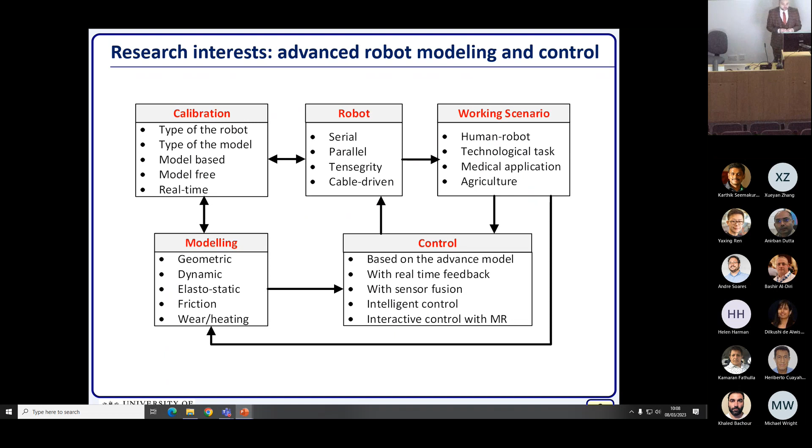Also addressing different sides of control, from advanced model-based control based on the models developed in my research, with real-time feedback, to intelligent control and interactive control using mixed reality interfaces.

Here's a brief overview of my career. I started in Belarus, working on design of experiment for robotic calibration. After, I moved to France, where I spent 7 years, and my PhD topic was on stiffness modeling for robotic manipulators, and I'm continuing research in this direction.

For my postdoc, I worked on industrial robotics, focusing a lot on geometric and elastostatic calibrations. These two parts I will present today. Further, in 2015 I moved to Russia, where I launched 4 new topics for me: MSA technique for stiffness model, human-robot interaction, interactive control, and trajectory planning.

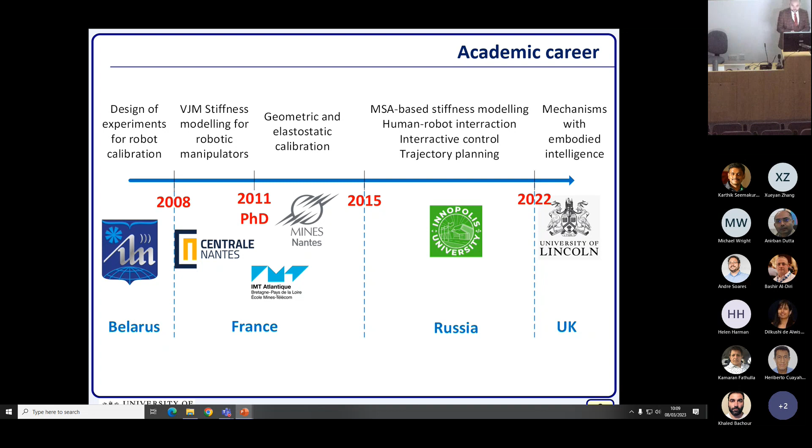And since 2022, I'm at University of Lincoln, and the new challenge for me there is to work on mechanisms with embodied intelligence.

Let me start from the motivation why I started working on contact operations and what it means for us. Usually when we talk about the interaction of the human with the robot, or the machine in different tasks, we have a reaction force from the technological process to the robot, from the human to the robot.

And in most cases, we think that this is a disadvantage for us. And that's true if you're talking about industrial applications—these forces affect the accuracy, and we need to do something about this.

This inaccuracy that we get is mainly due to flexibility of the robot, due to elasticity of the components we have. The only way to consider this and improve the model and control of the robot is to predict these deviations from the target and take them into account in our model.

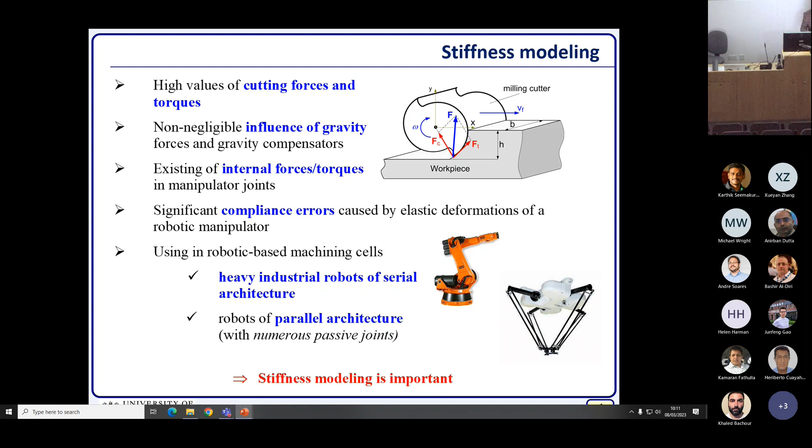That we can do through stiffness modeling. I should mention that stiffness modeling is important both for serial heavy robots, where the stiffness is high but the load is high and the external force in the technological process is high, and also for parallel robots that aren't heavy but have low cross-section—so for the same effort of 10 kilograms, you might get very essential deviation from the end effector of the manipulator.

There are 3 main methods in robotics to work on stiffness modeling. First is, I would say, the most reliable—finite element analysis—but we cannot do it in real time, so usually we use it only for validation.

In my research, I use this not only for validation, but also to estimate precisely the model parameters, and I will address this a little bit.

Another approach is matrix structural analysis. It's known from structural mechanics, but it's not yet suitable for nonlinear stiffness modeling, though I also have essential contribution to this one, and if someone is interested, I have about 20 slides at the end to present this topic completely.

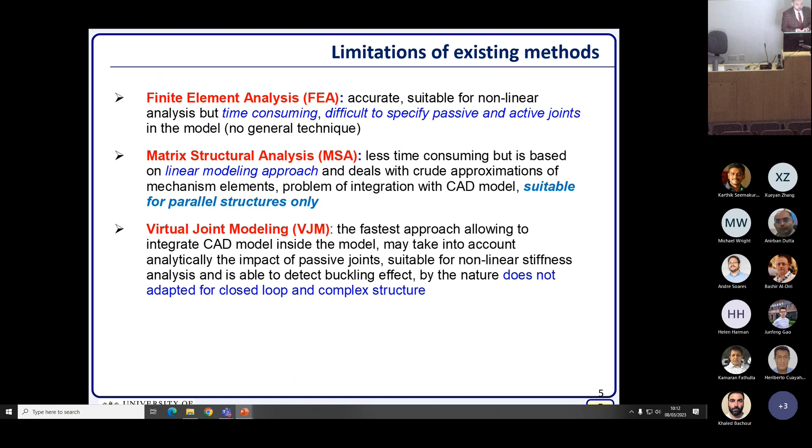And from my point of view, the best one—and it's an honor for me to be one of the co-designers of this approach—is virtual joint modeling, which extends the classical rigid body model and is suitable for nonlinear stiffness analysis. I would like to address it now.

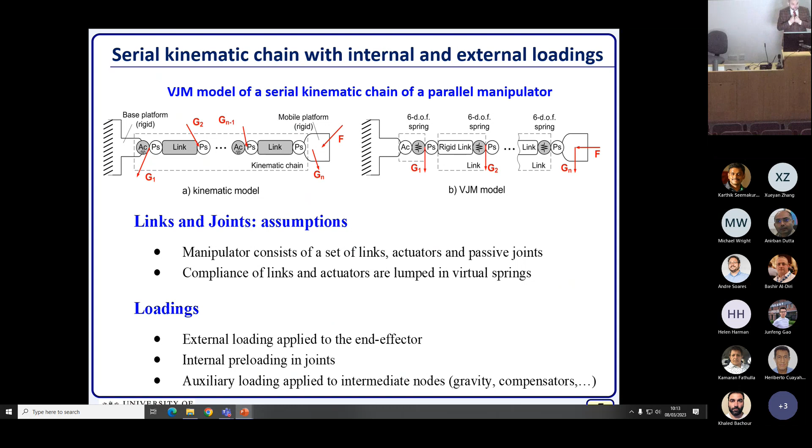In virtual joint modeling, we represent our classical geometrical model, and we replace the flexible components like links, actuators, robot base with perfect rigid components describing geometry and elastic springs that take into consideration the elastic properties of these links. So here, for example, is how we can represent the Stewart platform.

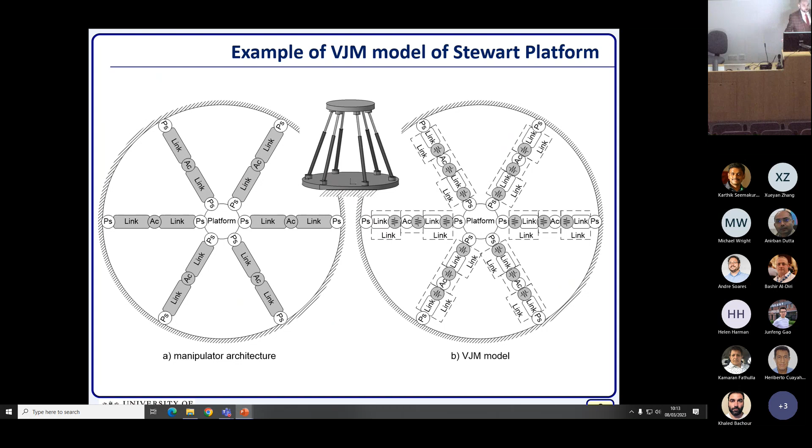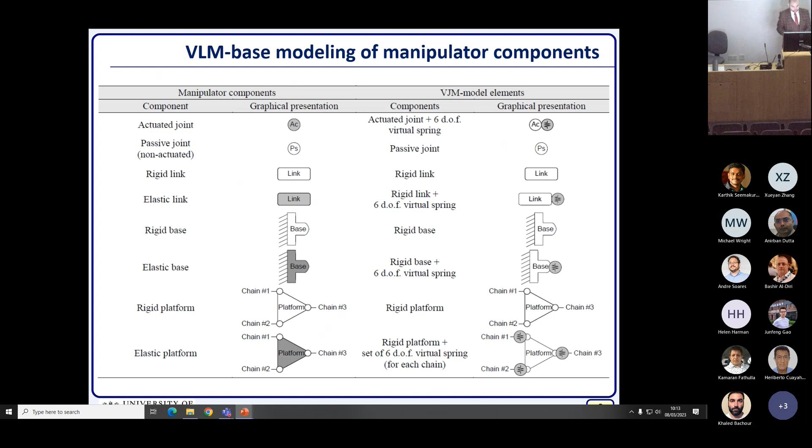So we have elastic links. We represent them with rigid links and perfect rigid links and virtual springs, actuators, virtual springs, and passive joints. They are passive, they don't have any elasticity, so we keep them as they are. So here there is a complete library of how we can transfer the components of the model into a VJM model - how elastic components transfer, how rigid components, and how passive components.

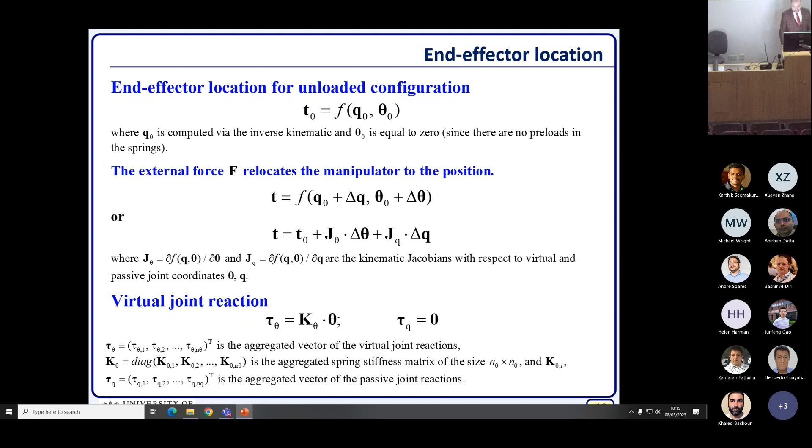So all these deviations of the end effector and the reaction in joints will create some virtual work inside of the virtual springs, and we'll have reaction due to elasticity, like here matrix K theta that aggregates the stiffness property of the link. So here you see the solution.

How we can evaluate this - what we did is develop two basic techniques that can be used for stiffness analysis of different types of manipulators under loading. On the left hand side you see the numerical routines, where we can simply combine the matrix and extract the component after the inversion. The disadvantage of this approach is that sometimes we need to invert a high rank matrix, because here, for example, Jacobian J theta, this is Jacobian with respect to virtual joints, has a high dimension.

It has a high dimension. So if you have 30 virtual joints or 30 springs in the system, it means it has 30 by 6 dimensions, and it can be 80% of the matrix dimension in this case.

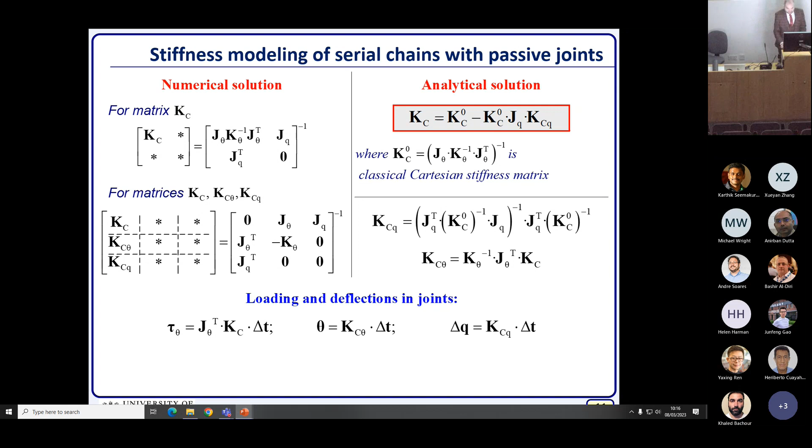It's clear that adding a passive joint decreases the stiffness. That's why we have a minus here in the equations. And with these routines, we can easily...

get analytical solutions even for parallel robots, like the Stewart Platform, for example. With the two-assembly mode, we can get this solution, and we can get a full rank matrix, and we can get a rank deficient solution. So it's quite evident that we don't have a reaction on rotation on Z here. That gives us stiffness equal to 0.

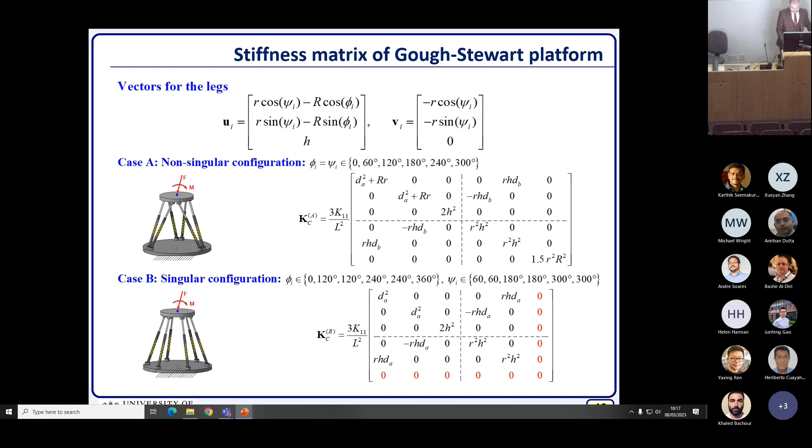From that point of view, we can also use stiffness analysis to detect singularities, because at a singularity we have a rank deficient stiffness matrix as well, while we can still compute them either numerically or analytically.

So in all mechanical structures, we will have errors, and these errors will affect the position of the manipulator. If we talk about serial structures, usually they will be accumulated. While when we talk about parallel structures, they will be accumulated for each kinematic chain, and after, when we combine them together, we will average the errors.

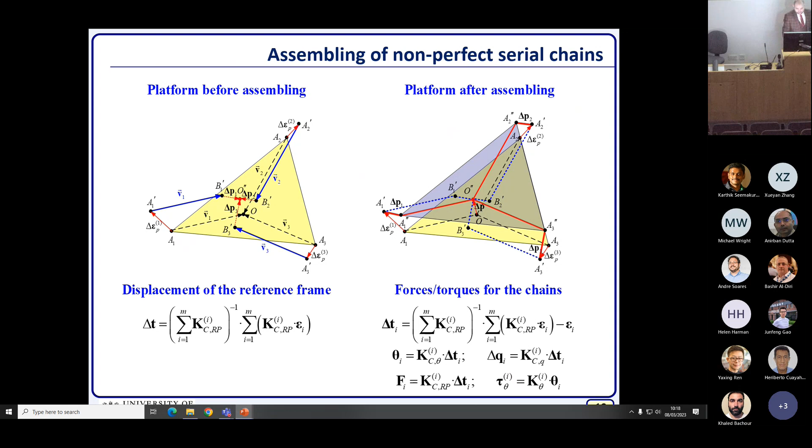While to be able to assemble such a structure that has errors in the kinematic chains, we will need to introduce force. So we will get preloadings, and we'll have routines allowing us to compute the deviation of the end effector due to inaccuracy in the serial chains, and allow us to compute the reaction forces in each chain and the corresponding reaction force and energy. So that solution is obtained using the minimum of energy principle.

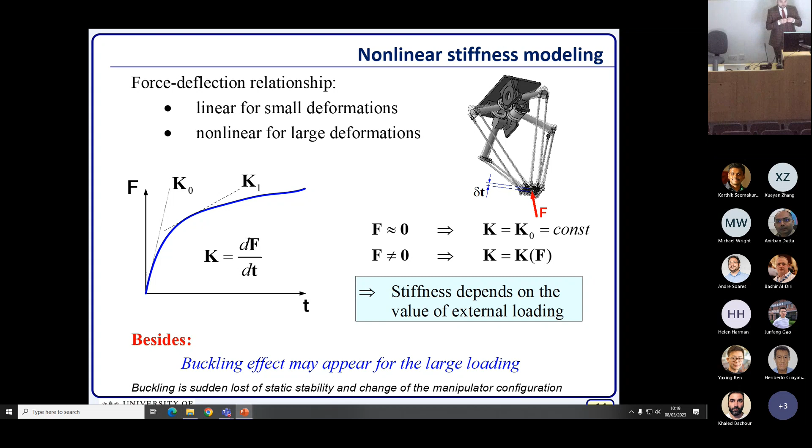I'm proud to be the first one who detected this effect in robotic structures, and the approach we developed allows us to estimate the pre-buckling and post-buckling condition in mechanical structures. We know this from column buckling: when we apply force at a certain level, the column doesn't change shape essentially, but after that it drops down. The same might happen in robots. Here we're not talking about buckling of elements, but geometrical buckling of the structure.

That suffers from instability with a much lower force we need to apply. So to address the nonlinear stiffness analysis, first we need to find the equilibrium configuration. We use static equilibrium equations and geometrical constraints specifying the end effector positions, which allows us to derive an iterative procedure to get the state for the static equilibrium configuration.

So here, what we are given is the position and the shift of the position, where the end effector moved, and we compute the reaction force F and corresponding deviations in the virtual and passive joints. What's important is that after the configuration change, we need to recompute the Jacobians, because they should be computed in the vicinity of the current loaded configuration.

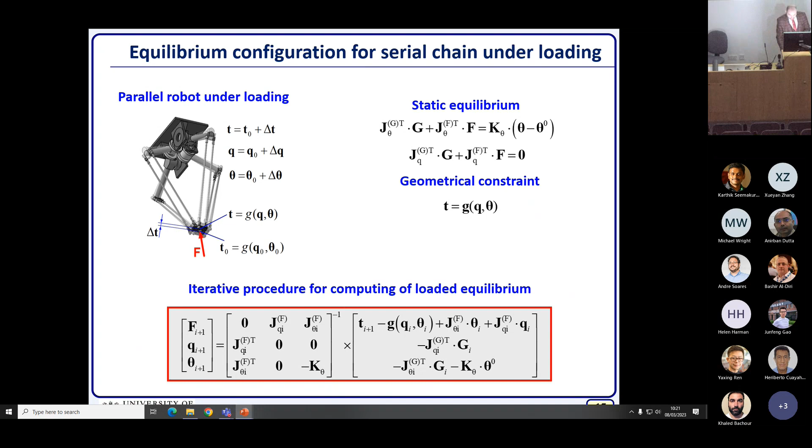Here we might have different types of loading, some of which might be neglected. For example, the vector G is aggregate auxiliary loading, the loads applied at the node points. It is not always present, so if we don't have a load in the middle of the robot, we can take this out. And F is the force applied to the robot end effector.

So after we computed the equilibrium configurations, we can estimate the stiffness property of the robot. To compute the stiffness matrix, let's estimate this property, so here we go to this position.

Usually people consider like K0, this scenario when we address only the linear zone at the beginning, while currently, if the force is high enough, we can move beyond the linear shape, and here we will be able to get this.

If you look at the equation here, it consists of a Hessian matrix, the second derivative of the Jacobian of the geometry. So it's the derivative of the Jacobian multiplied by the applied force, and this is the main difference with respect to linear stiffness modeling. The effect of the force is integrated inside these Hessian matrices.

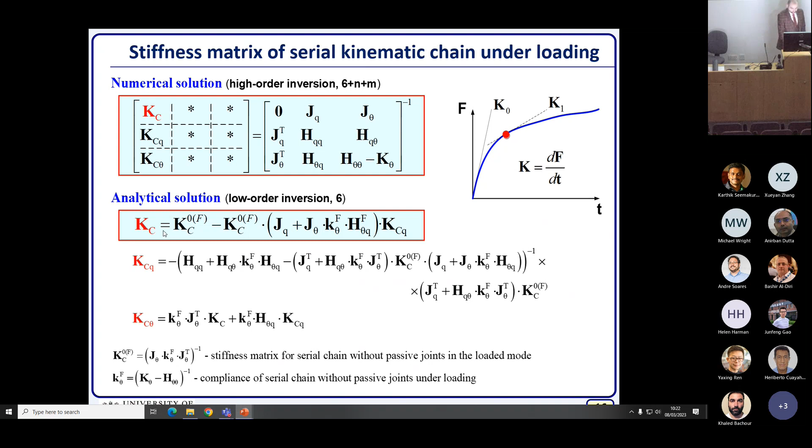The Hessian with respect to QQ is the second derivative with respect to passive joint coordinates, like Q theta passive and virtual joint, and theta theta with respect to the virtual joint. This is the second one. Again, we can use numerical and analytical solutions, allowing us to estimate the stiffness matrix here.

When we talk about the loaded mode of the robot, we might have both stable and unstable configurations, and that's critical for parallel structures, to be sure that we're in the stable one. Because if you're in an unstable one, the configuration can suddenly change without our control, which is something we don't want.

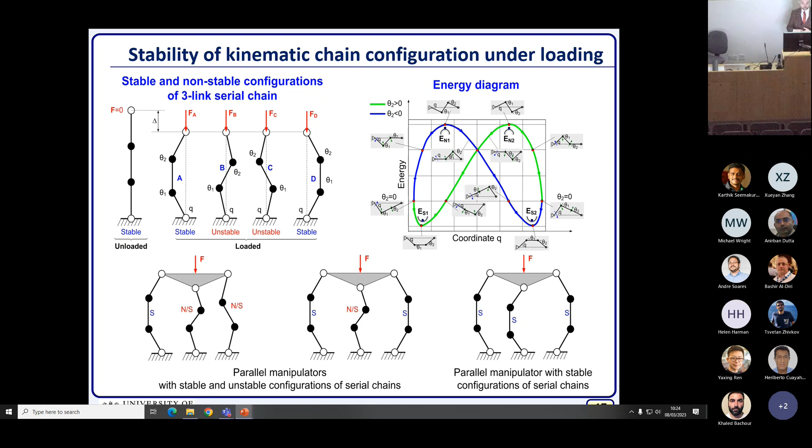Here, for example, the minimum of energy will correspond to the stable equilibrium, and the maximum of energy will correspond to the unstable equilibrium. In practice, we will not see unstable equilibriums, but we can get them numerically, while any disturbance in a physical system will move us out from this unstable equilibrium. So we need to be sure.

To evaluate which equilibrium configuration we obtained numerically, we developed a matrix criteria that is also based on the geometry and elastic properties of the material, using singular value decomposition of the extended Jacobian of virtual and passive joints. And if this matrix criteria is negative, it says that the equilibrium is stable.

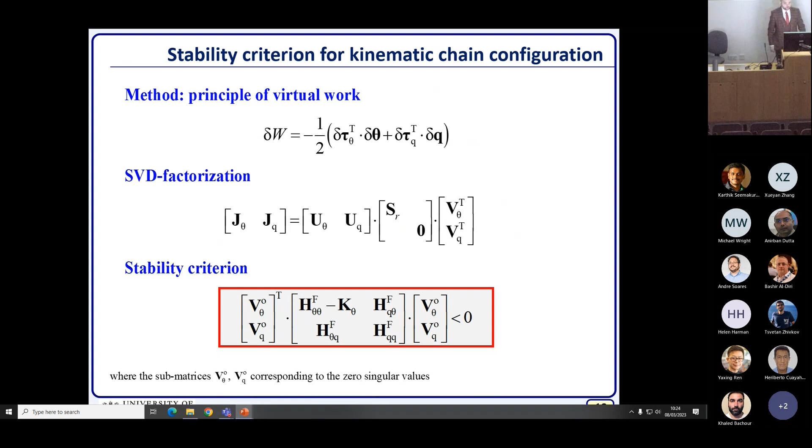So if we found that the equilibrium is unstable, what we need to do is add some noise, add some disturbance, and run the procedure again, and it will converge after this to the stable configuration.

So here you can see some results, what we can do with this approach. For example, this is a linear system, with the three-link system. So when we apply loading up to a certain load, we don't have any deviation of the end effector.

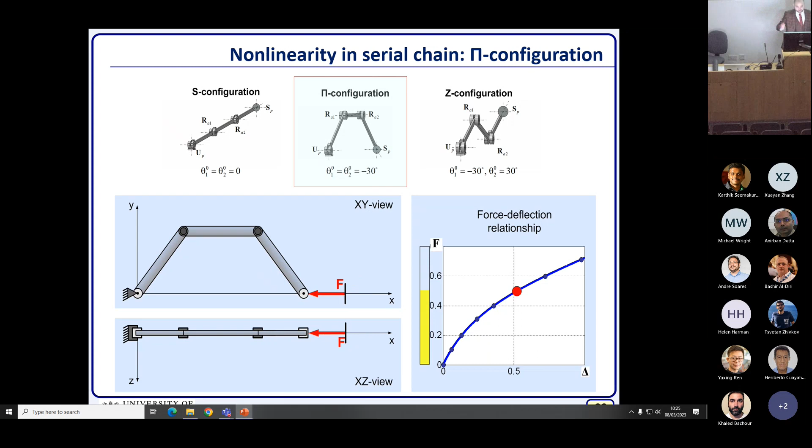But while the force reaches a critical value, the behavior changes completely. You see this graphical representation, so we can work with the nonlinear behaviors. Like here, we don't have a buckling effect, but nonlinearity that changes the stiffness properties, and we can properly evaluate and predict the stiffness under any load we applied.

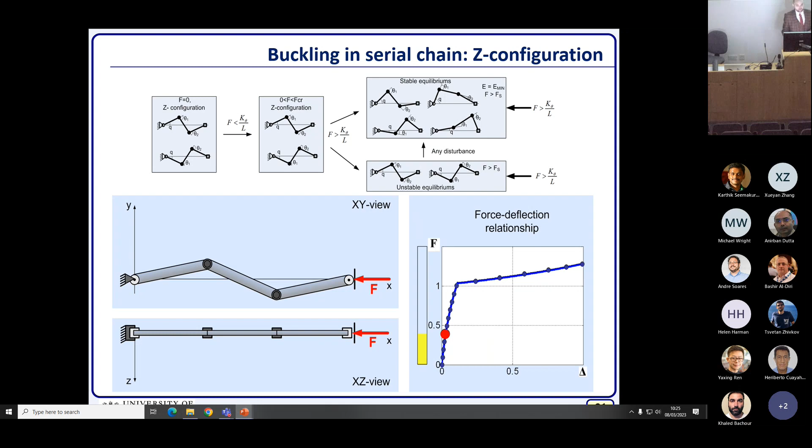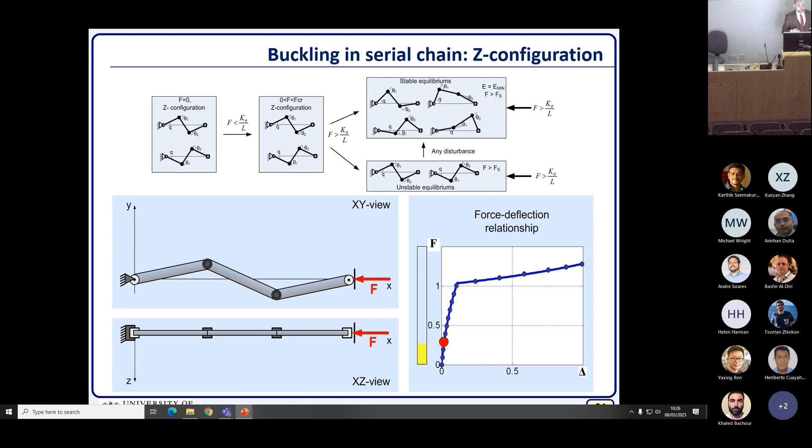And also we can have nonlinearity and buckling effect. Nonlinearity happens at the beginning, and after we can observe a buckling effect, a change of this plane. So the buckling might happen in the plane of nonlinearity, or the buckling might happen in the orthogonal plane as well.

What else we detected is that there is another source of singularity. We're always talking about geometrical singularity, but in practice we might have also elastostatic singularities. That's where, under the loading, the kinematics will fall down from this yellow zone.

So what does it mean? That geometrical singularity that we have there, in practice, will not be reachable, because the force will move it for this. So if we have a gravity force, at least the weight of the links, we will pass for these geometrical singularities where we probably may lose control.

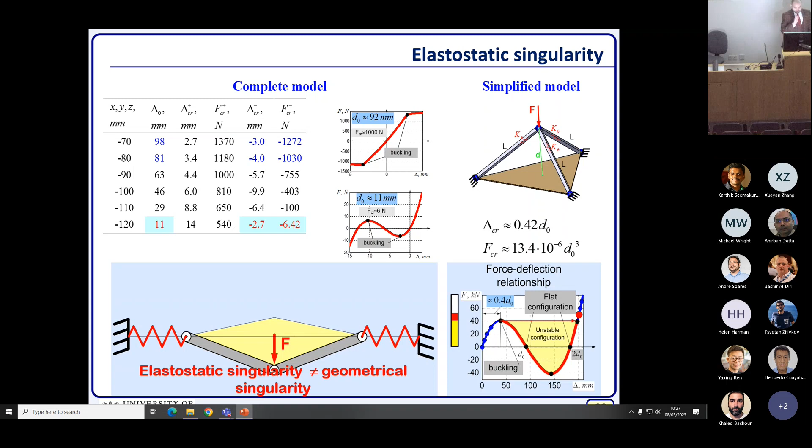And this path, okay, we can see, we can model it inside of this yellow arrow. It corresponds to the negative stiffness, so we have a negative stiffness along this one. So that's how the approach works when we combine different chains in it.

So we can use it to model sophisticated robots, serial and parallel. With the serial it's easier, but for parallel, when we combine multiple chains, here we are capable to identify also the buckling effect.

As you can see, the force is high enough, but this is for these two particular configurations. When we approach the flat configuration, near flat configuration, the force decreases, while we can always estimate the critical force up to which it's safe for us to operate.

Because even though we can simulate the behavior before and after buckling, in reality we'll have some uncertainties, and the buckling effect can happen like 1-2% before or after in terms of the force magnitude, and this will affect essentially the behavior. So in practice, we prefer to avoid these conditions, but we need to know when it happens to be able to react to it.

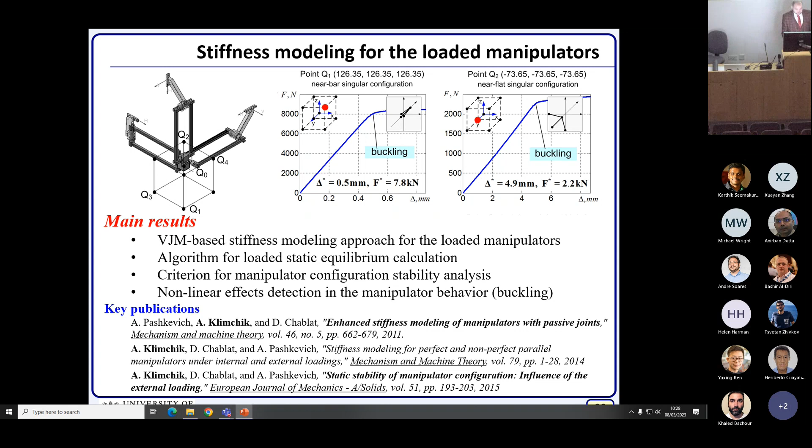And why we need all this stiffness modeling? We want to use it to compensate the technological process. And it's a pity that up to now we don't have such abilities in the robot controls, so we need to design a special precision system.

So basically, to be able to compensate compliance errors, we need to have our own compensator that has a direct geometrical model that is exactly the same as implemented in the robot controller, and an extended inverse model that contains not only geometrical but also stiffness model that allows us to predict deflections.

So in this case, we give a desired trajectory to our compensation algorithm, and we obtain a modified trajectory that is different from the target one. But this is the trajectory we are sending to the robot control that ensures that the output trajectory will be close to the target one.

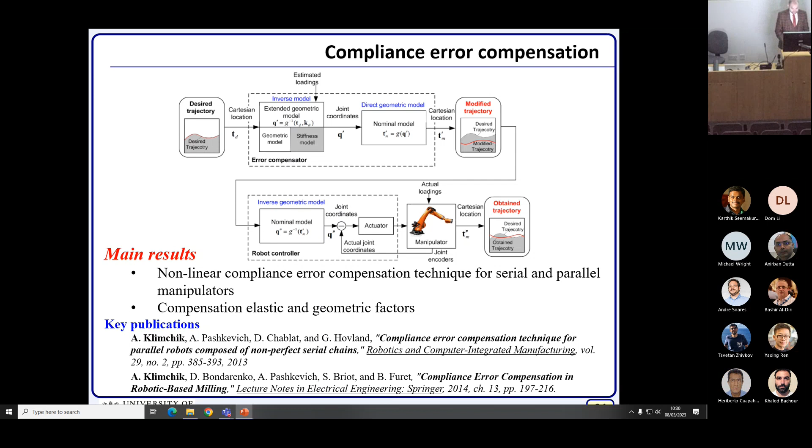We're not targeting to have exactly the same, because in practice it's not possible. We want to be as close as possible.

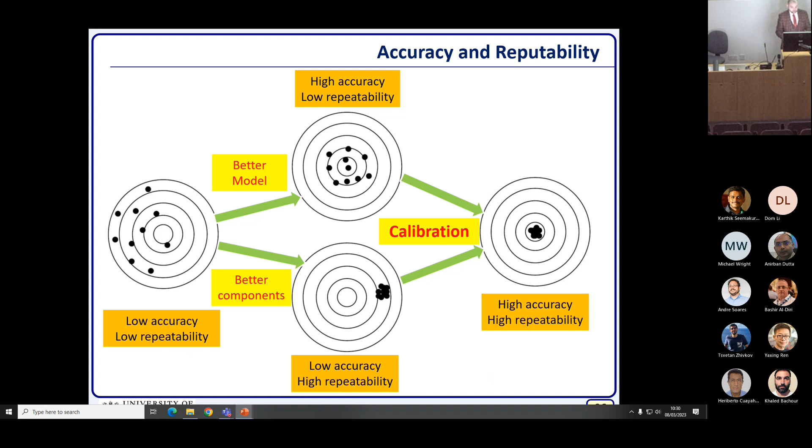Another topic I want to talk about is related to elastostatic calibration, and here we will talk about accuracy improvement. We want to have high accuracy and high repeatability. But when we start working with robots, in most cases we might have high repeatability only, while high accuracy is never ensured by the robot manufacturer, or anyone. So we need to target this one.

So to be able to deal efficiently with robot calibration, we enhanced the classical calibration technique. If you worked before with calibration, the traditional calibration procedure includes 4 steps: modeling, measurement, identification, and implementation. While from my point of view, one step is missing there - it's selection of the configuration that we will use for measurement.

So we introduce here an additional step between modeling and measurement. It's called design of experiment, allowing us to improve the efficiency of calibration. Here we can target to reduce the errors or reduce the number of experiments we need to get sufficient accuracy after the calibration.

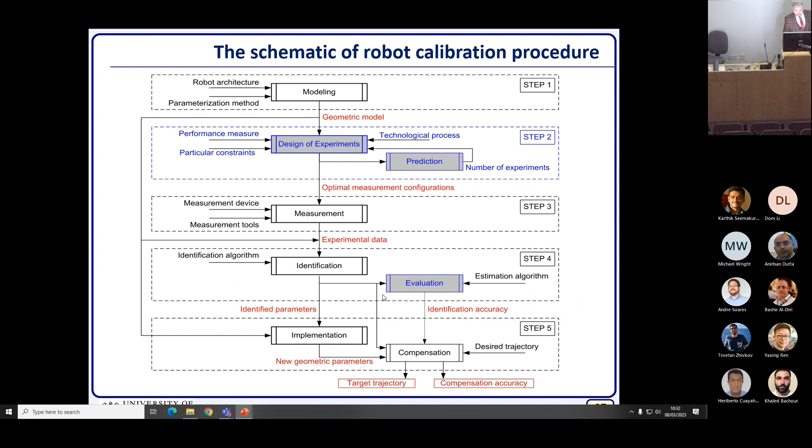That's basically what we did, and I will talk about this. So, when we address the elastostatic calibration, we have some additional constraints and particularities compared to classical geometrical calibration.

That everyone knows. For example, on the modeling step, we need to integrate flexibility in it. We need to take into consideration applied force, and that gives us much more parameters in the model that we need to address, and not all of them are decoupled, and we're capable to decouple them, and I will talk about this. Also the influence of gravity, so we need to consider this.

On the measurement step, we will rely not on single measurements of position, but on the difference. So we need to measure the position with loading, with two different loadings, or with loading or without loading, and we need to measure the force. The main limitation here is that the force magnitude is usually limited by the torque we are allowed to apply for the motors.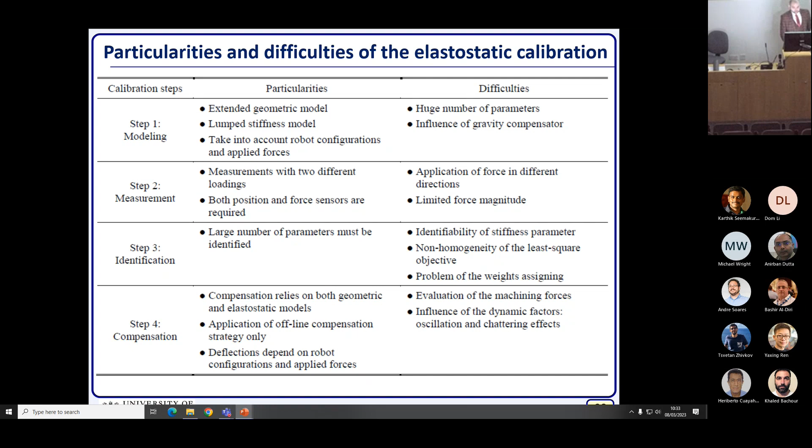On the identification step, we need to define much more parameters, and in compensation, as I mentioned already, we're not able to implement the elastostatic model in the controller itself. We need to design our own model, and we need also to evaluate the forces here.

So here it's a basic equation that we use for geometrical errors mapping. We use a linearized model with the Jacobian and the set of parameters delta pi we want to get. The mapping of compliance errors, usually we have this equation with K theta in between. We rewrite it in a similar way as a geometrical one, where A is the so-called observation matrix here, and K is the vector of designed compliance parameters, and optimization problem.

To solve this, we can write it in a generalized form where B is the observation matrix, either Jacobian or A matrix, and delta X is the set of unknown parameters. Standard solution and identification accuracy, we can estimate via the covariance matrix estimated in the experiment using this. So the difficulty here is how to choose the B matrix. Usually many people choose this randomly, while that's affecting the final quality, sometimes a bad choice of configuration can even decrease the calibration accuracy.

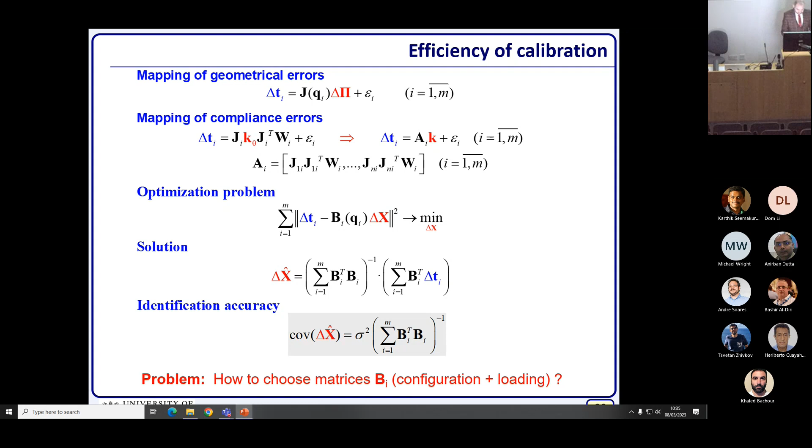The difficulty in elastostatic calibration is we have twice more parameters. We have not only configuration, but also the loading that we need to consider as a parameter. So to be able to work with meaningful values, meaningful meaning of what we are doing, we propose a test pose based approach that estimates the accuracy of the calibration procedure, in terms of the technological process we are going to perform on this robot, for example.

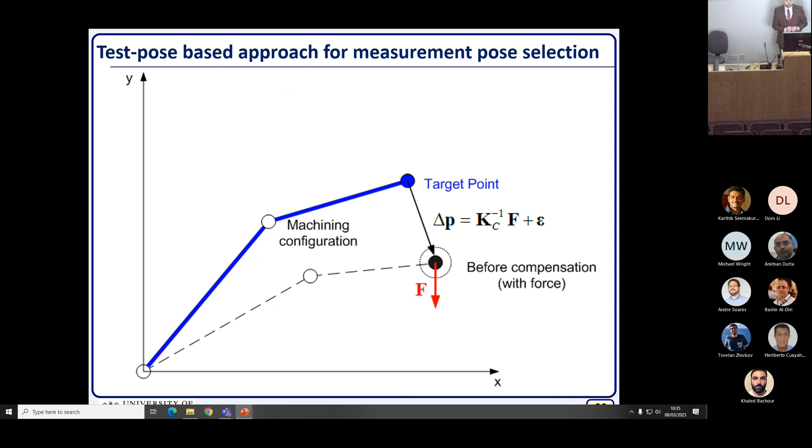So let's imagine that we have a target position shown here, and the technological process moves the end effector with the force F to some position. What we will do in this case, we will compensate it. We will get an opposite configuration with minus delta Q for this one. So the green one, this is what we are giving to the robot, and basically we move to some position that is close to the target one, but not never will be the same.

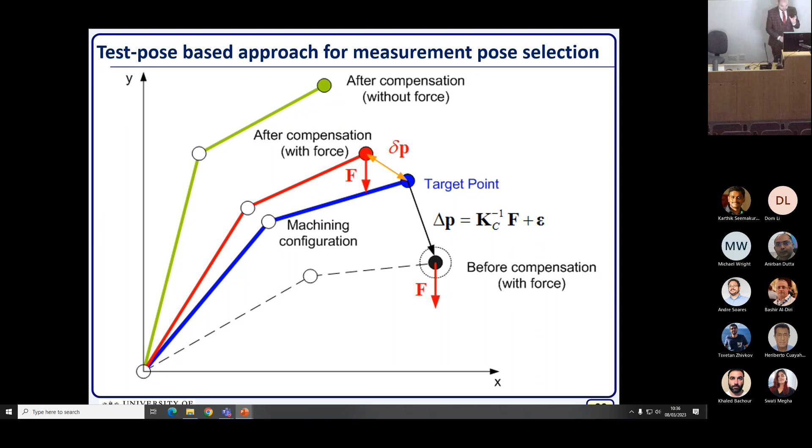And we have some distance rho, the delta p, that we introduce as a performance index here, specifying the efficiency of calibration. And we want to minimize this distance from the statistical point of view. So we estimated, from the model data, and proposed this performance measure that has two types of matrices.

Like BI and B0. B0 is our test configuration, in the conditions in which the robot will perform the operation. Basically, this is the area of the robot where we want to have the highest precision. So we don't always need to have high precision within the entire workspace. If the robot is performing in a small area, for us it will be sufficient to have very good accuracy here, while moderate accuracy in the entire workspace.

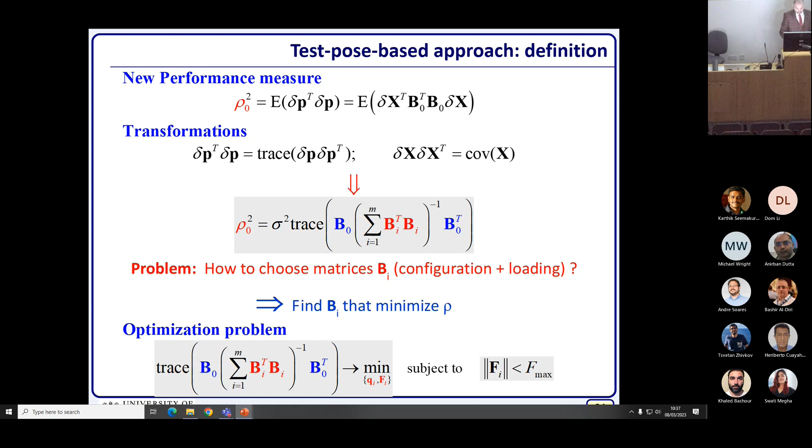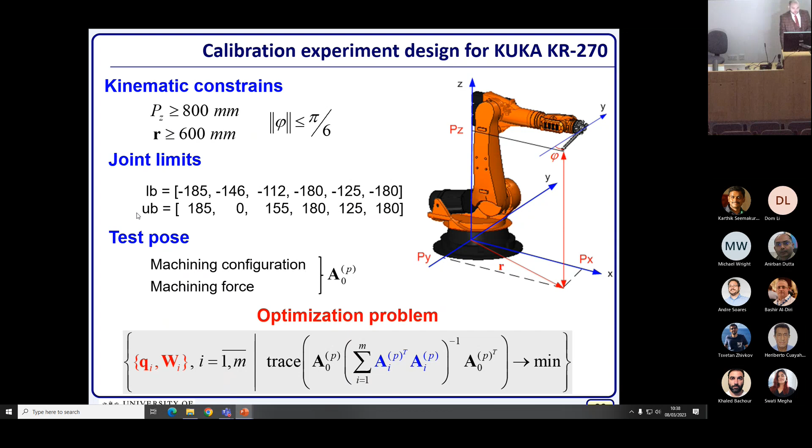So this performance measure, rho square, gives us an optimization problem that we need to solve subject to the constraints of geometrical constraints and force constraints we can apply. This is like the typical constraints, for example, that we use for robot calibration. So when we carry out experiments, we have a limited zone where we can apply force. We also have constraints related to measurement visibility, so where we can put markers that indicate the position and orientation of the end effector. Also have joint limits and so on.

The design of experiment techniques is a powerful tool allowing us to increase the accuracy, but it's quite computationally complex. For example, with 12 different configurations, we're talking about 6 parameters for force, 6 parameters for configurations, which means 144 variables, and we will not be able to find the global minimum for this one.

So to make it easier, we investigated how critical it will be if we try to use quasi-optimal solutions, if we try to go to the low dimensional plans.

It was not a surprise for us that we found that instead of carrying out simulation experiments for 12 different configurations, we can select 3 different configurations and solve the problem 4 times, or repeat measurements 4 times, and the accuracy will be roughly the same as using 12 different configurations, while this saves essentially the time for us.

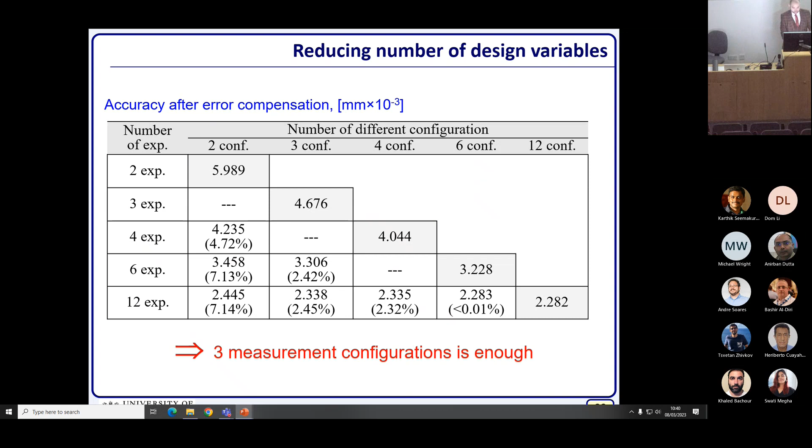This also has another advantage: we can eliminate the human factor if results were recorded incorrectly, and we can also track these errors. So three measurement configurations from here will be enough and give good results.

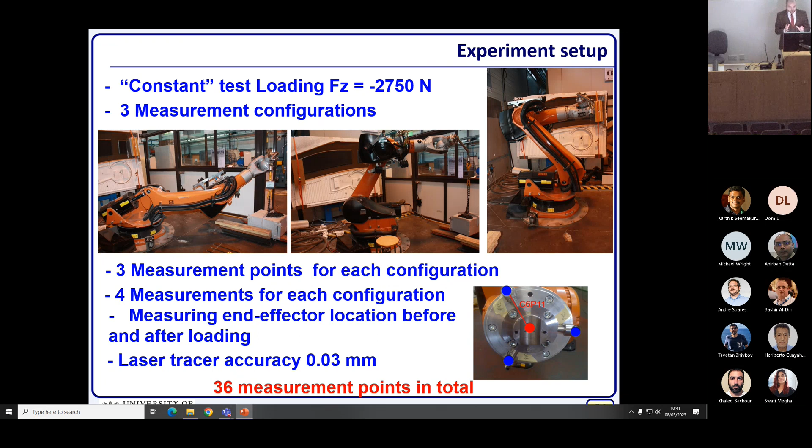This is some experimental setup that we use, for example, in France for robot calibration. We use a payload, we use force measurement, so we applied maximum force, and here we use 36 measurement points in total. I will not present the results now, I will present them later.

Now I would like to address another issue, related to the estimation of the parameters. For example, if you address the link stiffness, I took here the model from a real robot, and for this link I have a sophisticated model from the CAD, and I can calculate this k value obtained from the CAD.

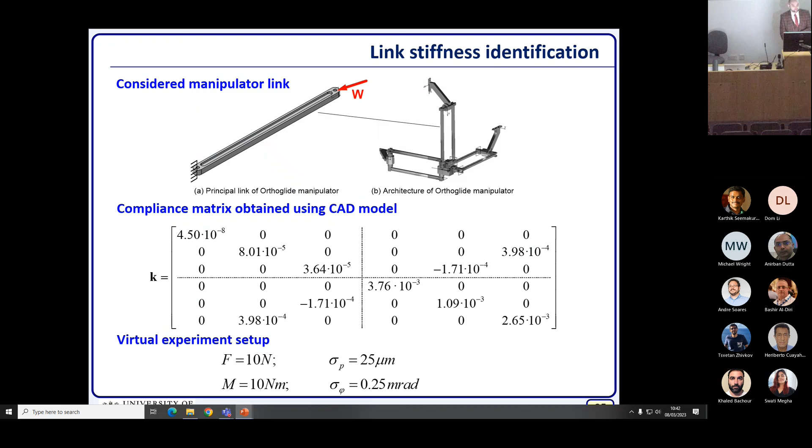While if we try to emulate the experiment, we want to obtain this data from the real world, not from the simulator. So we carry out the experiment, apply force, add measurement noise that we will always have from the measurement data, and try to evaluate these values. So this is just what we obtained.

So which property do we want to have? The stiffness matrix should be positive defined. But the first component K11 is already negative, so it's not positive defined. The matrix should also be symmetrical, but we don't have symmetricity here - it's approximately, but not exactly symmetrical. And also we have 36 different parameters, while if you remember on the first slide, we had a lot of zeros.

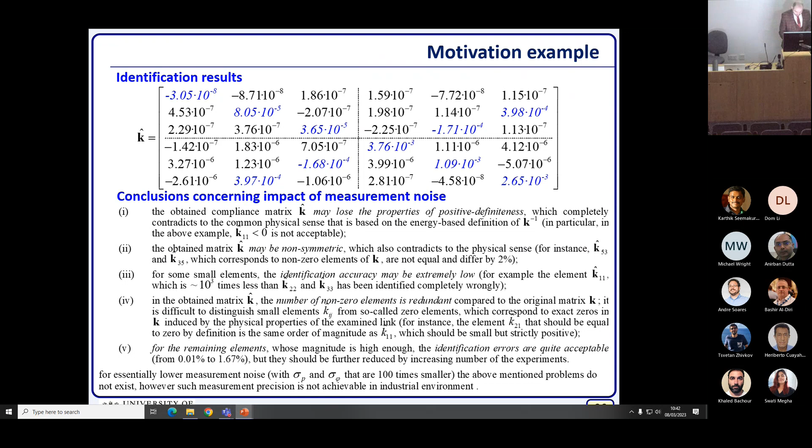If you evaluate the ratio of the parameters we estimate with respect to the noise, we will be surprised that some parameters are lower than 1. What does that mean? That the noise contribution to our estimation is much higher than the magnitude of the parameter we extract. That happens with the simulated data, and approximately the same happens with the real data we get as input. So based on this, we can conclude that we probably shouldn't believe everything we get from the real experiment, and we should properly filter the data.

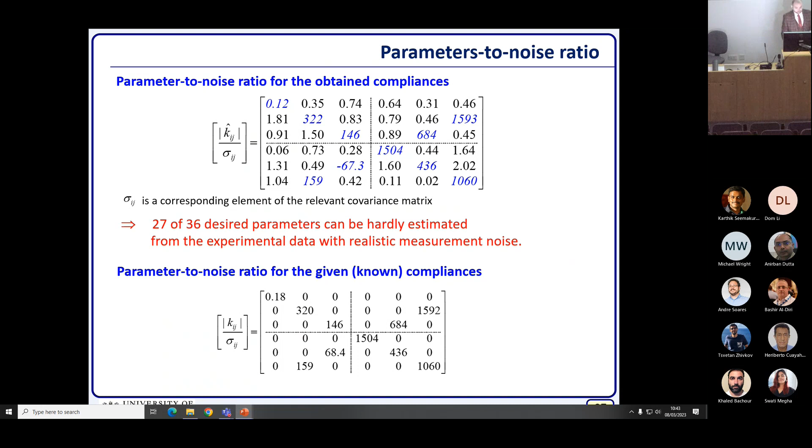One idea was to introduce an additional metric: a parameter-to-noise ratio that gives us an accuracy measure.

Going in general to the elastostatic parameter identification of the robot, the general solution can be written in a way where we have many redundant parameters. When we consider only joint elasticity, we have 6 parameters and no problems. But when we assume that not only joints but also links might be flexible, each link basically introduces 36 parameters, and we will go over 250 parameters for a traditional serial manipulator.

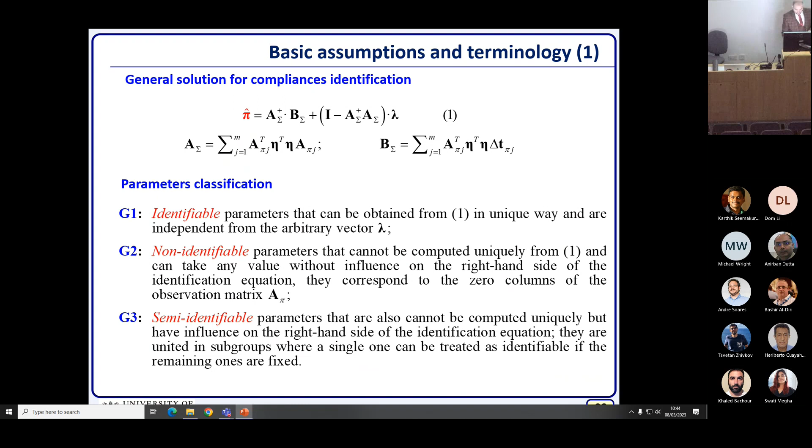Here, these parameters need to be decomposed into identifiable ones that we're capable of identifying from the experimental setup, non-identifiable ones that aren't important and can be removed, and semi-identifiable ones that aren't identified separately but are grouped with others, so we need to keep some parameters and fix the rest. Apart from this, as we already saw, some parameters might be identifiable from mathematical routines, but from a practical point of view, they are not significant.

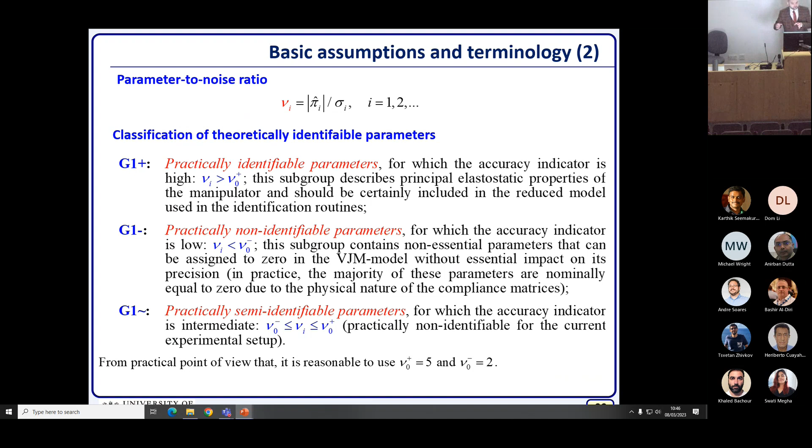Here we are introducing three other groups inside of identifiable parameters: practically identifiable parameters that have a statistically significant meaning in the model, practically non-identifiable parameters whose values we cannot believe from at least this experimental setup, and practically semi-identifiable parameters that are probably identifiable, but with the current experimental conditions or number of experiments carried out, we cannot believe truthfully in this result. We need either to change the experimental setup or the number of experiments to see if the ratio will increase or decrease, to keep or take them out.

So we develop a framework allowing us, step by step, to develop the stiffness model that we are able to identify from real experimental data.

In the first step, when introducing the model, we need to take into consideration that each link induces not 36 parameters, but since it's symmetrical, it's maximum 21 parameters. So we take into consideration the symmetricity property.

The second one is sparsity. We have a lot of zero components, and we can develop an approximate model of the link in the CAD and extract the benchmark and use this benchmark. For specialists working with the CAD model, it's quite easy, looking at the model, to say which parameters should be non-zero.

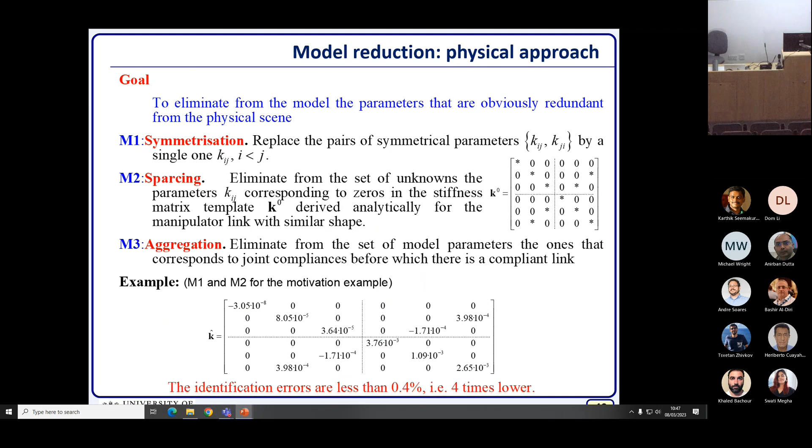The third step is related to aggregation of different parameters. For example, we have a flexible link and flexible actuator. From the point of view of measurement of the end effector, we will not be capable to distinguish the deviations in the link and in the joint. So these parameters are coupled, and that's why we aggregate them, reducing these parameters.

So that was the first stage. The second stage: we need to understand which parameters in the remaining model are identifiable, non-identifiable, and semi-identifiable. The number of identifiable parameters we can get from the rank of the observation matrix. And if we use a singular value decomposition of this observation matrix, we can extract the coupling between these matrices.

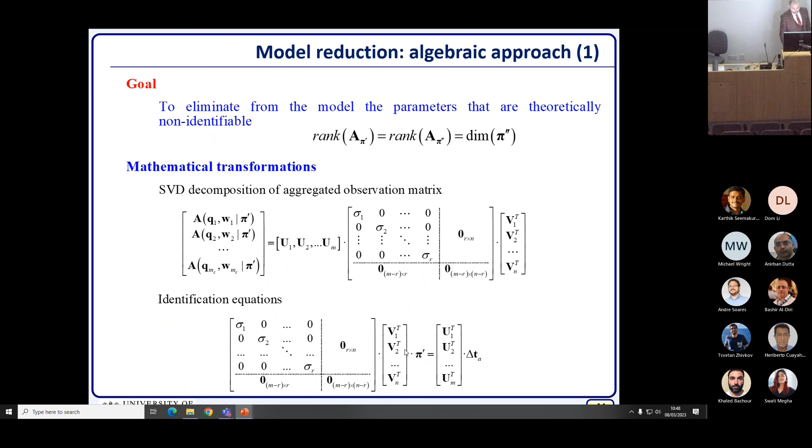So this is the basic routine for how we get the solutions, and here are the rules for how we get the parameters. Basically, after singular value decomposition, we will have a part of equations giving us meaningful values, and a part of equations giving 0 equal to 0, with a general solution and a particular solution π'0 that we use here.

On the first step, we decompose the parameters into identifiable, semi-identifiable, and non-identifiable. Identifiable parameters will be completely visible, so we change one parameter as an input and we will have it on the output. Non-identifiable parameter changes will not affect the change of the end effector measurement, so we will not see any of them. This is the easiest part.

The most difficult is the coupled parameters, group 3. So there are two rules, rule 1 and rule 2, allowing us to specify identifiable and non-identifiable parameters, and all the remaining we put in group 3. This is semi-identifiable, which we will work with later. So non-identifiable parameters we eliminate here.

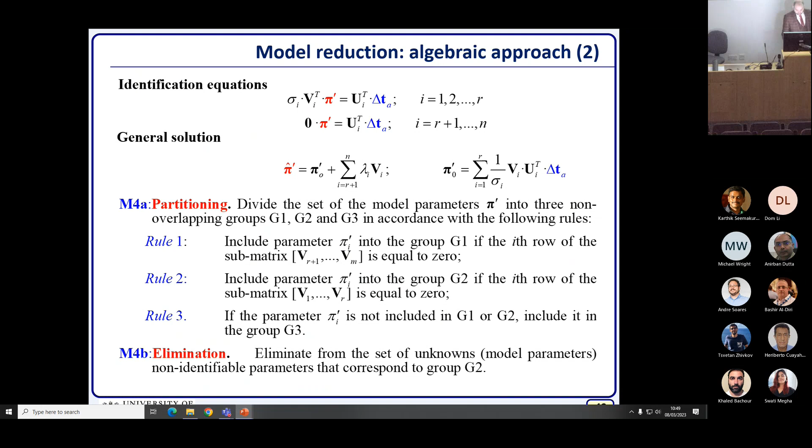With the semi-identifiable parameters, we get the corresponding observation matrix A with respect to these parameters, and we use singular value decomposition, giving us a full rank component and an extended component. Based on this, we compute the matrix L, which gives us the relation between the components.

From this matrix L, we will see the blocks of components that are coupled. Looking at these components, for each block we can compute the rank of this block and select, either manually or with some procedure, which parameters we want to keep in the model, and the remaining we set to some constant or to zero.

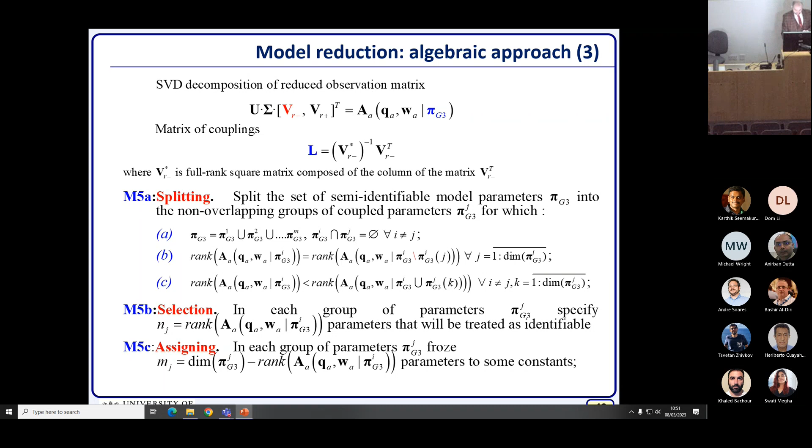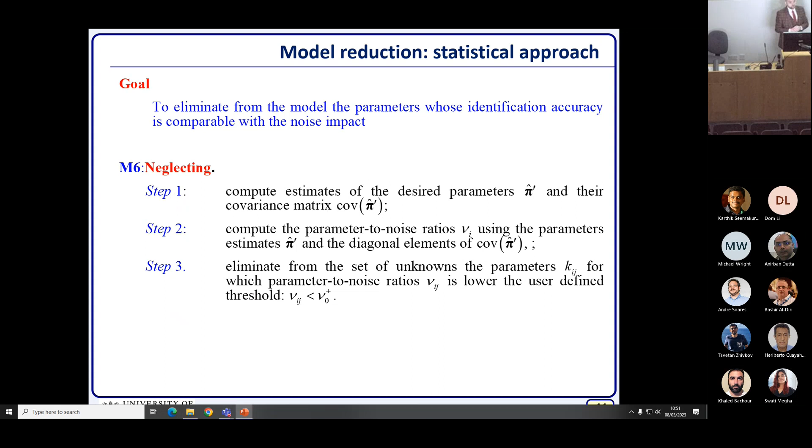The last step is related to neglecting statistically non-significant parameters. After we obtain the elastostatic model, we evaluate the noise impact on the parameters, and we keep in the model only the parameters that have a statistically significant meaning.

So this is the experiment, and how these steps are applied for a real robot, and what we kept in the model. The original model had 258 parameters; the physical approach reduced it to 56 parameters. You can see the steps. The algebraic approach reduced it to 26.

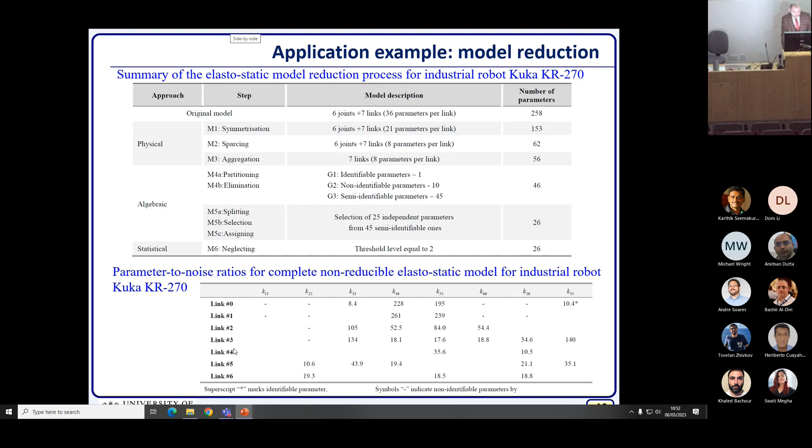Since we already used intelligence, some knowledge when we selected the parameters, we already know which parameters will be small, for example compressions of K11 components. So we got all the parameters that are statistically significant, and this is the structure - which parameters from the link are kept in the model.

Here is the result comparing two different approaches. The reduced model, that's what most people use, and what we achieve in terms of accuracy in a single component and position, versus the complete model that contains 26 parameters.

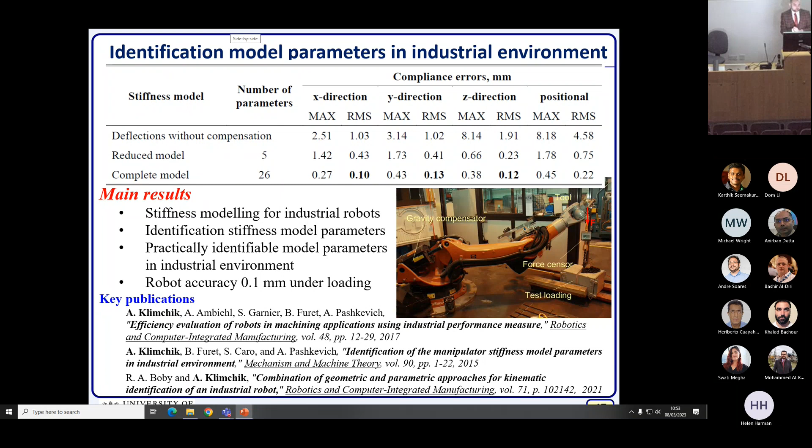What I would like to stress here is that with the complete stiffness model extracted from the real experiment, we reach the physical limit of what we can have for this particular robot, taking into consideration robot repeatability and the measurement accuracy of the measurement system. We had about 100 microns per position measurement - this is almost the physical limit we are capable of having here.

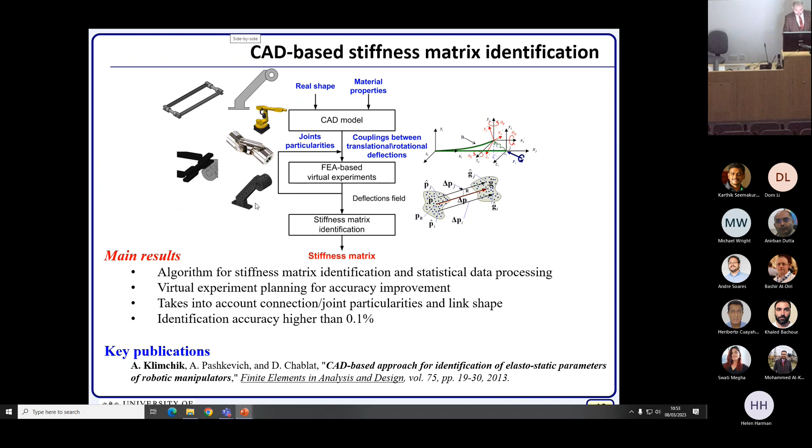And to be able to evaluate the parameters, like the model, to get a valid model, we also developed the CAD-based stiffness matrix identification technique, allowing us to get a sophisticated model. I'm not going to talk a lot about this, so this is just the reference for the paper.

Another part of the work I did is related to working with a robot with double encoders, which induces much more possibility in terms of error compensation and parameter identification.

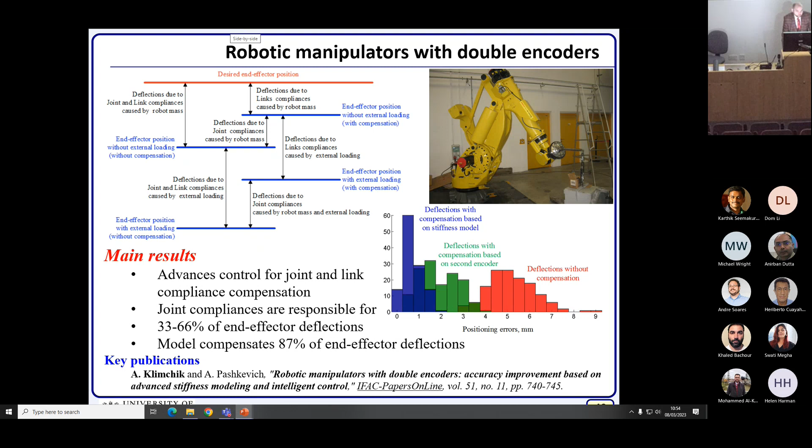The proposed approach allows us to go to the blue zone here in terms of accuracy on this plot, while the embedded technique with the secondary encoder compensation gives the green zone here. And if you are not relying on any compensation technique, you'll be in the red zone here in terms of accuracy. So we are 3 times more accurate compared to the embedded approach when we rely on the stiffness model.

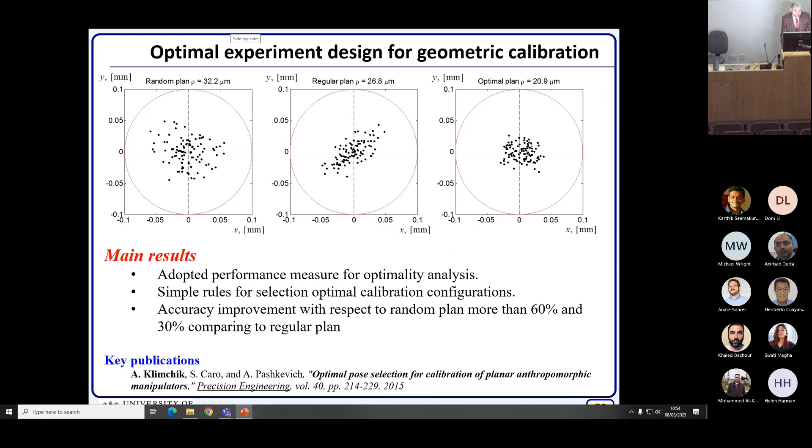So that's the effect of the optimal design of experiment for simple robot calibration - how the accuracy will look like if you have a random plan, a regular plan, for example traditional, versus if you apply something more sophisticated. This is also another part of my work that I mentioned.

I worked in human-robot collaboration, particularly with interaction and extracting knowledge from the interaction. Our objective was to understand the nature of the interaction and to understand where the interaction happens, and based on this, select an appropriate reaction.

So we're not using any extra external sensors, only internal ones, and all of this works in real time. There is some visualization delay, but the whole system is working in real time.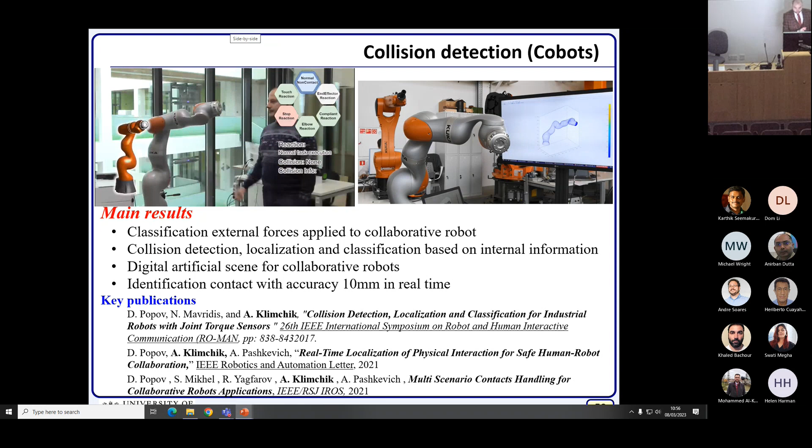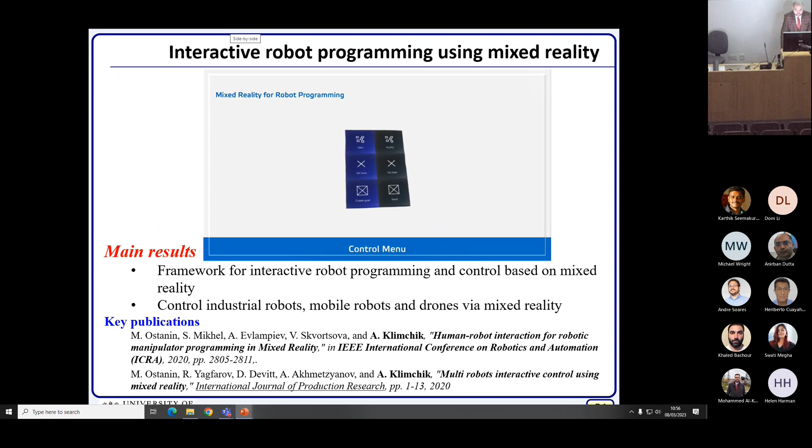Another work I did, mainly with my students, is related to human-robot cooperation. It's related to using mixed reality to design the control strategy and interaction scenarios with the robots.

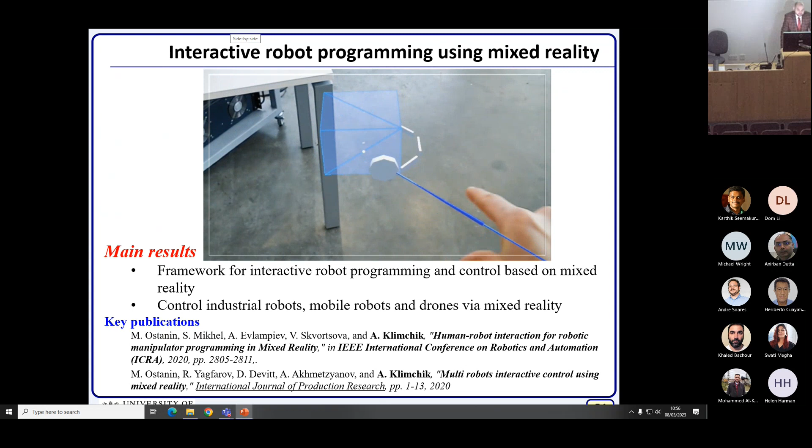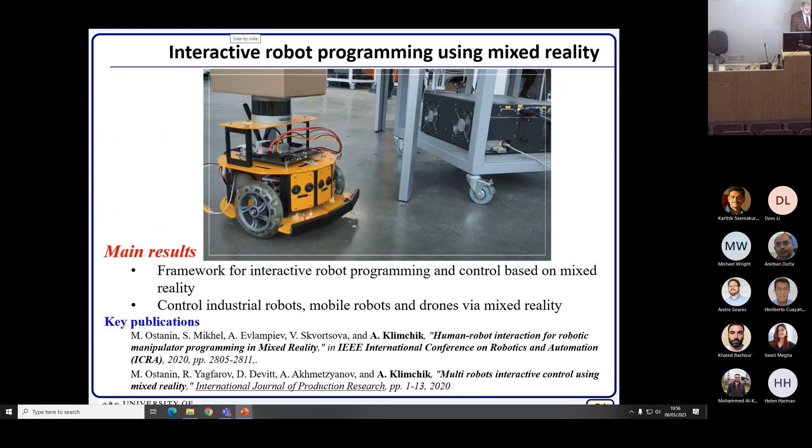We completely emulated the robots in the virtual environment. We did this with the robotic manipulator, with drones, with mobile robots. We are capable of seeing what happens in the virtual environment and evaluating if we are satisfied with these solutions, then we send it directly to the robot.

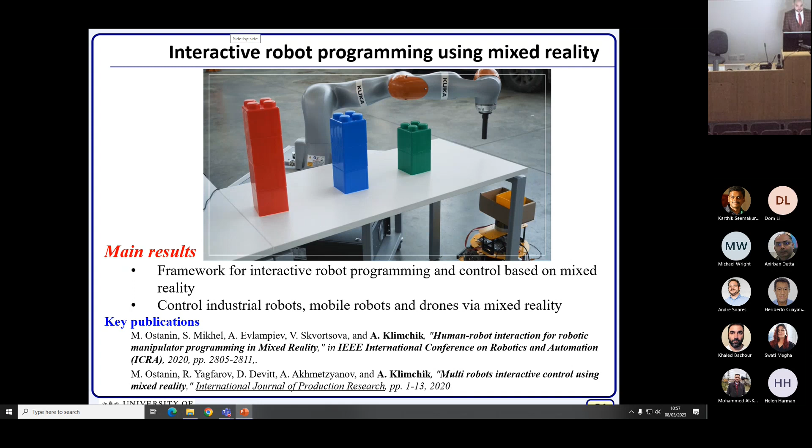Here we're merging different technologies. We're using ROS as a framework that allows us to merge different objects, different aspects. And the operator here, you can see the real robot and virtual robot, how it works.

Another part of the work I mentioned - we don't have time to present it in detail - is related to matrix structural analysis, and this approach is mainly developed for complex structures. For example, in this example we have multiple closed loops.

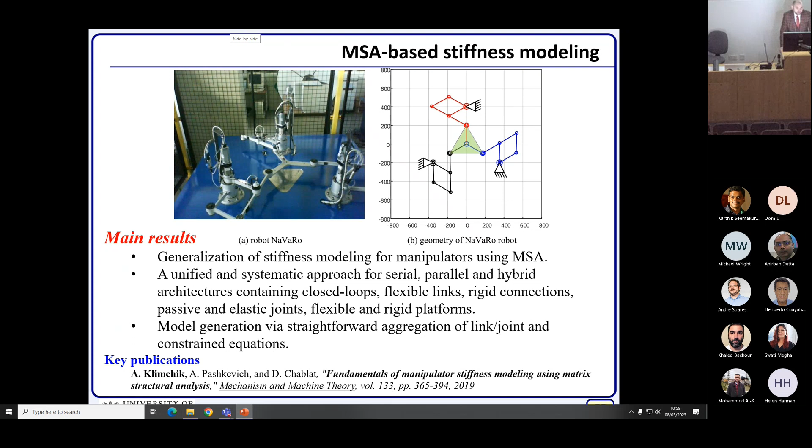We have a standard framework allowing us to describe different components, links, constraints, external forces, and integrate them in a system of matrix equations. And we have a procedure allowing us to solve this in a unique way.